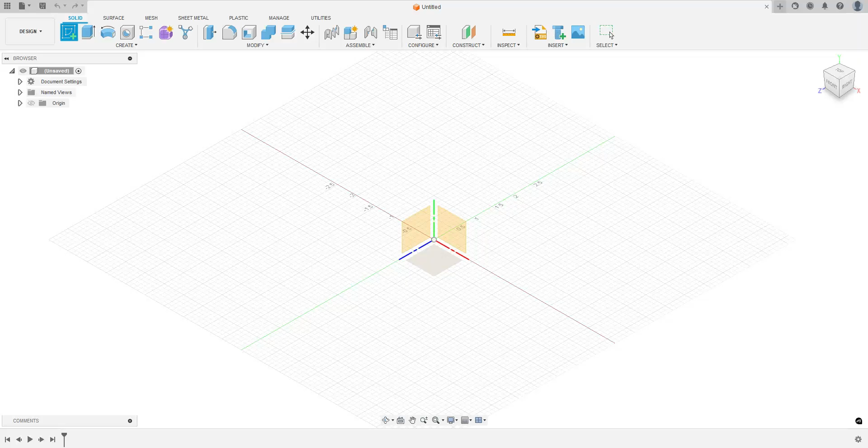Alright, we're going to get started here using the hole tool. First thing I'm going to do is just make a rectangular extrusion to show you how to cut holes into 3D objects. This will only work in extruded parts.

That being said, I'm going to do a sketch on top of this little box. To use the hole tool, you need to have a point to reference. I'm going to use the midpoint value here, so I'm just mousing over the edge of that line to find the midpoint. It shows up when the triangle hits. I'm going to add a point here, and I'll use this to do my hole tool.

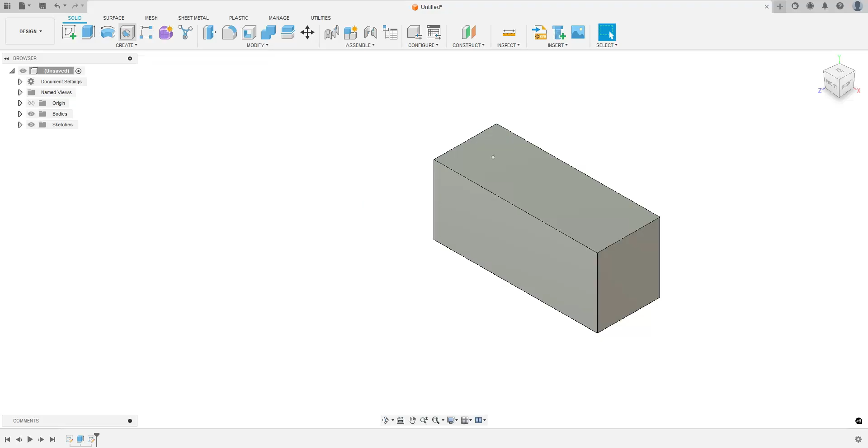So in the Create tab, there is a tool called Hole. When you open it up and click on that point, it generates a hole that you can add some specific information to. You can still use the distance and the edge, just like you can when you're extruding.

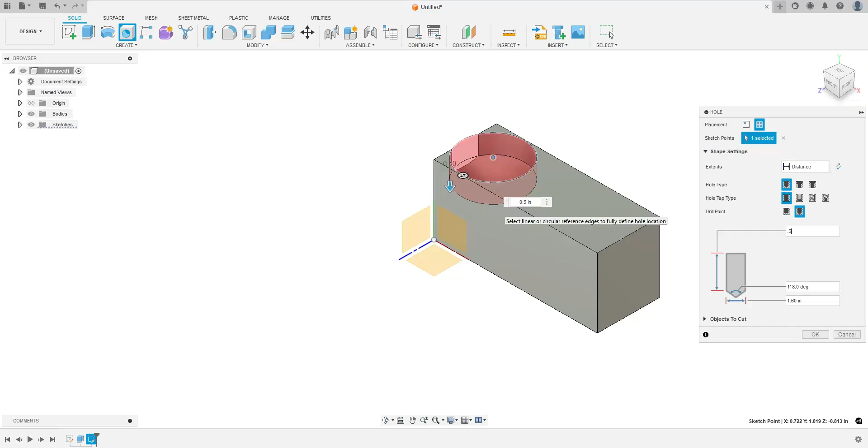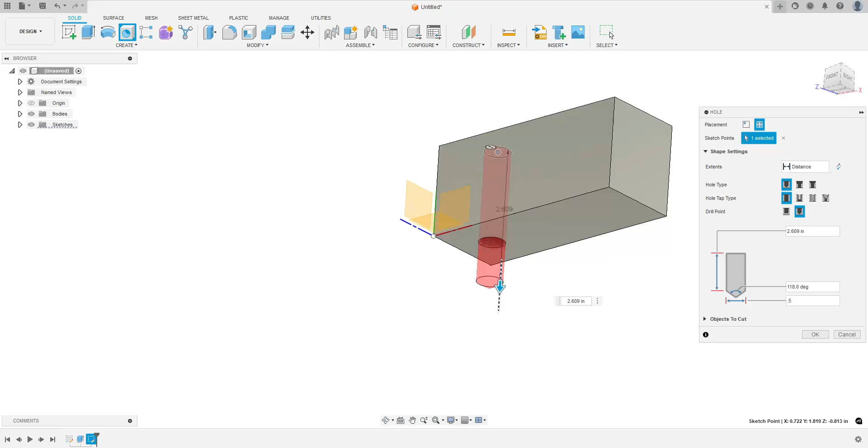You can add specific sizes and dimensions here, and these are all things that you would take with your calipers for whatever fastener you're going to use. I can also make this go all the way through. If I select To for my extent and then click on the opposite face, it doesn't go all the way through like this and accidentally cut into one of your other parts.

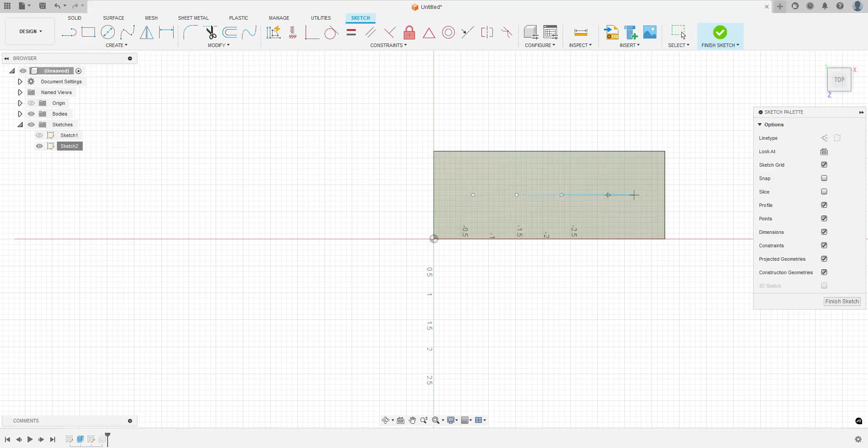Alright, so I'm going to add a couple more points here. I need to go in and edit my sketch that I just drew, so I'm going to right click my sketch 2 and edit it. Then again I'm going to grab my point tool and find that center point, and I'm just going to add a couple more points so I can show you the different types of holes that you can generate.

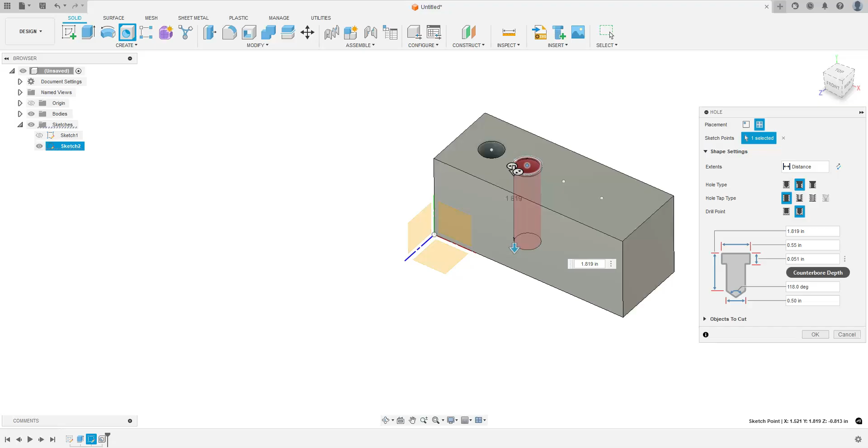Alright, now remember, when you use a sketch, it automatically disappears, so you have to use the little eyeball to turn those points back on. Okay, and now I'm just going to show you, we have countersink and counterbore, two different types of heads on a bolt or a screw.

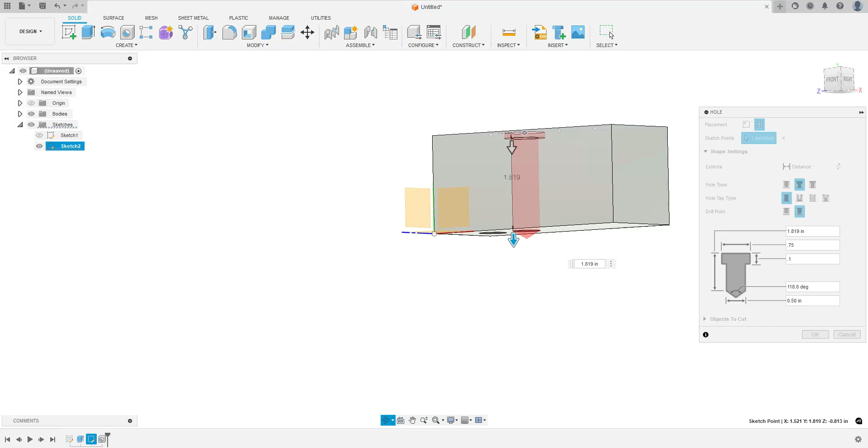Right here, it gives you a picture of the fastener and then all of the points that you would adjust. These are all things you could measure with the calipers to get this hole to match the fastener that you're using. Notice here on the bottom, I have a tapered kind of pointed end, and then I can also select a flat end. That all kind of applies to whatever fastener you choose to use.

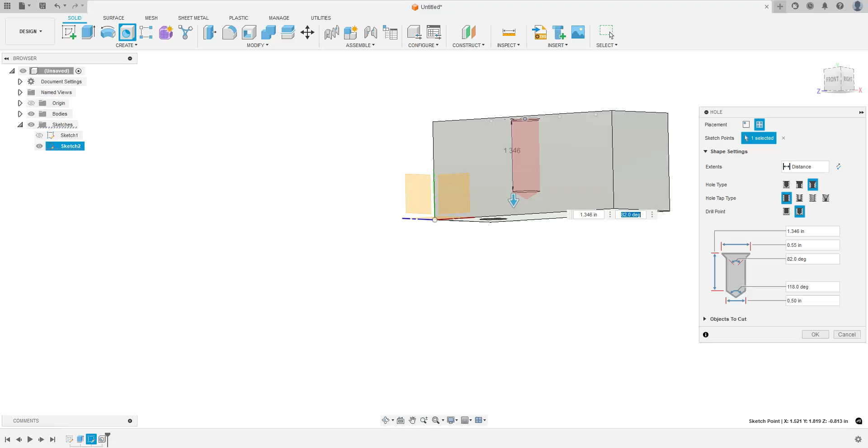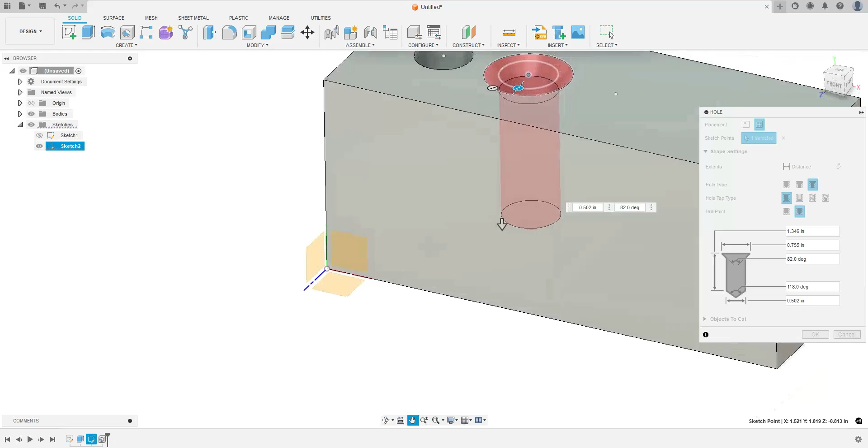Okay, now this one, just switching over to the countersink. So there's two circles on the top. One is the size of the screw itself, and then the top one is the diameter of the head of the screw so that you can get it to sink in and sit flush with the surface.

Alright, so the other cool thing you can do with the hole tool is you can select multiple points at once. All I have to do is hold down shift and you can select multiples. So if you have a project where you're making a bunch of holes and you're using the same fasteners, you can do this function once instead of multiple times.

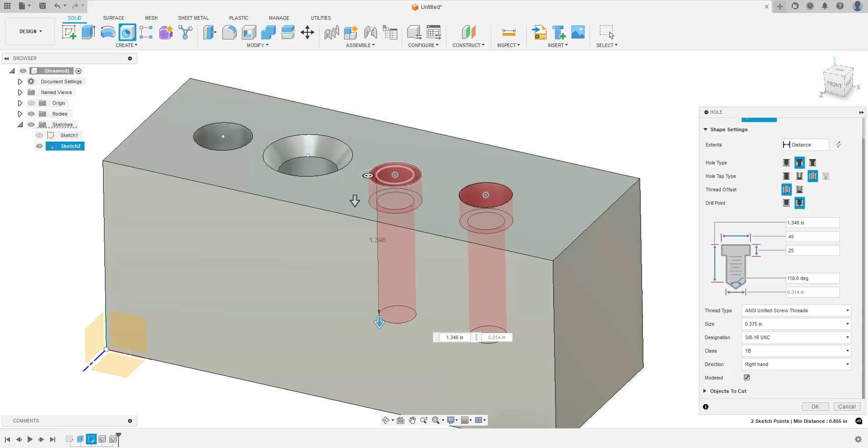So I went over to the threaded tool. This is if you're using a threaded bolt or a screw. Just select the 3/8 because that's a common size, and then adjust the head. These are things, again, you would fit to whatever specific bolt fastener you're using. I also checked modeled because I want to make the threads show up so that I can see them.

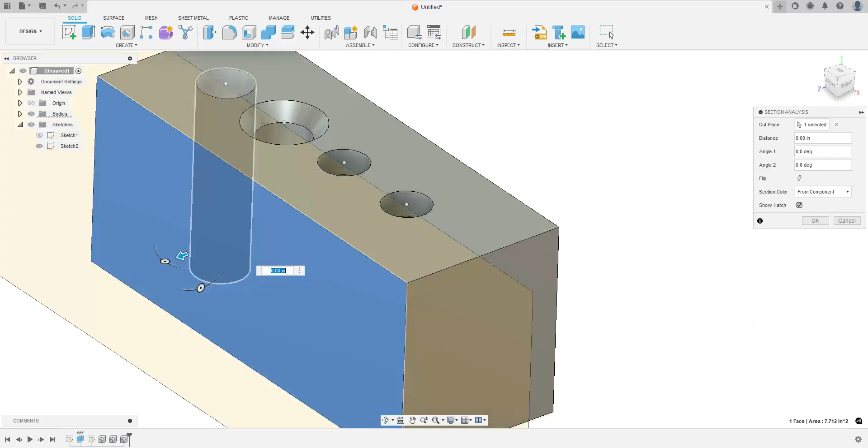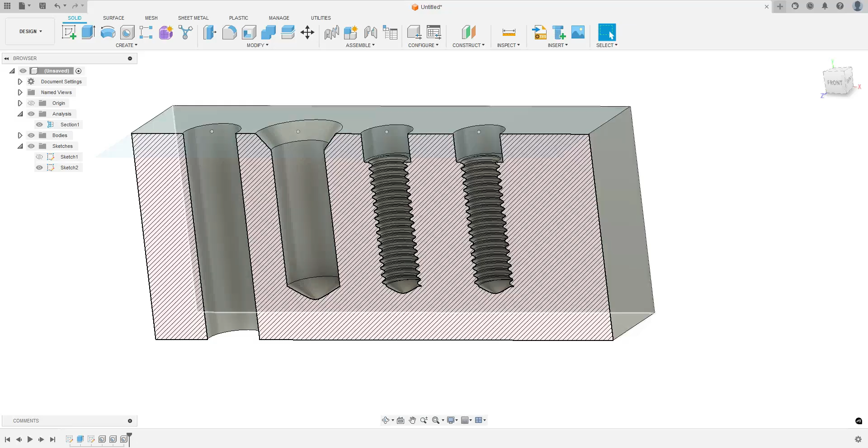Okay, and then another cool function here in Fusion is I can go into the inspect tool and click on section analysis. I can click on a face and it will subtract away the material to show me the inside without cutting my solid apart. So this way you can see the inside threads, what they look like. Again, you can click on your timeline at the bottom and then readjust those holes if you're going to go fine or coarse threaded.

All right, so check out lesson 8. We're going to learn how to use the revolve tool.